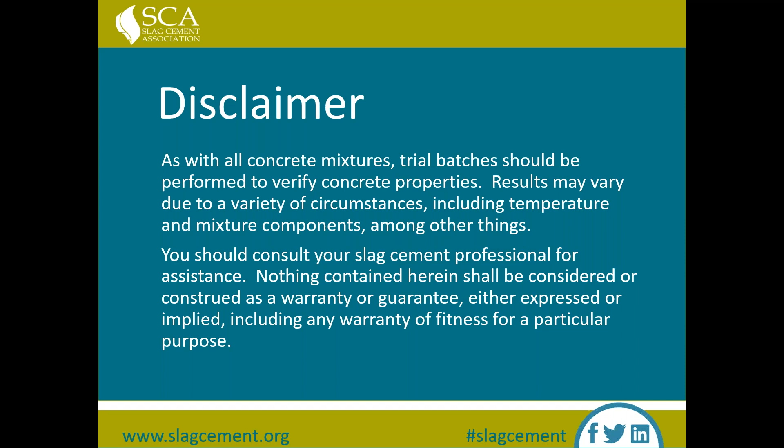Gordon McLellan is Technical Manager at Lehigh Hanson Slag facility in Cape Canaveral, Florida. He has been involved in the development and growth of slag cement, formerly known as ground granulated blast furnace slag, in North America for 28 years. After Queen's University, he worked with Coke Minerals in Sudbury, Ontario, Canada, developing applications using slag cement in mining, backfill, and geotechnical applications in heavy construction.

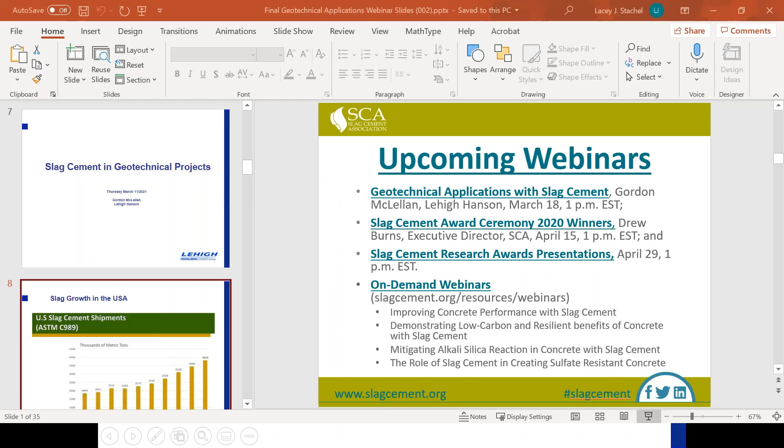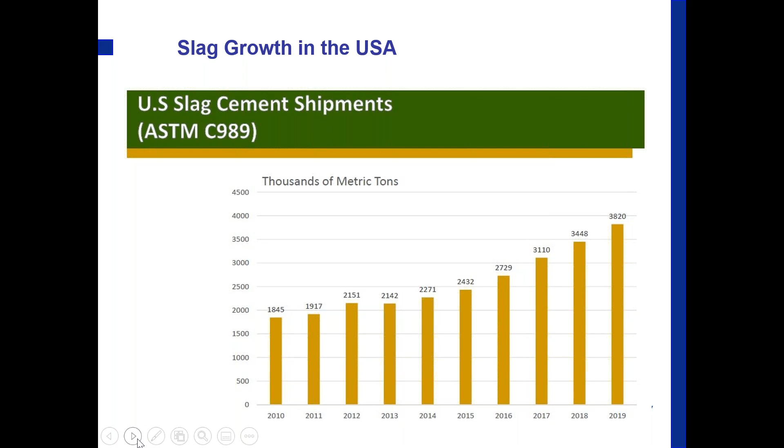I'd like to start just by talking a little bit about slag cement and specifically slag growth in the USA. As you can see, we're approaching 4,000,000 metric tons of slag with some fairly amazing growth over the last 4 or 5 years. In fact, it's fair to say we've doubled since 2010 in product and product availability. And for various reasons, I would like to think that it's mainly the high performance and the environmental concerns driving us towards using more slag cement. Next, please.

So the main difference is that the finished product, the slag, which is floating above the Fe, can be characterized more as a dicalcium system. What we're really missing is the C3A and C3S that we find in Portland cement, but everything else is there. Another way to look at it is typically calcium in Portland cement runs 60 to 65%. Calcium in slag tends to run between 38 and 42%, and most fly ash is below 10. So the fact that slag cement can be viewed as a hydraulic cement shouldn't come as too much of a surprise when we look at the genesis, with that vertical cement kiln versus the horizontal cement kiln. So let's look at what happens to the slag floating on top of the Fe. Next, please.

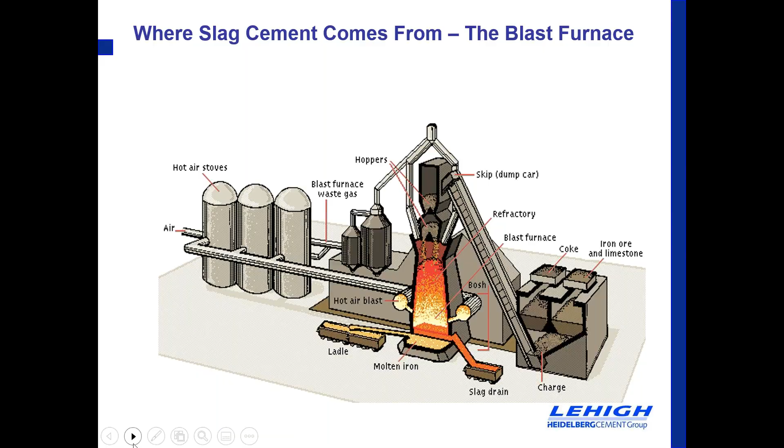I love this picture. It's the color more than anything else that to me, it is energy. We are showing energy. In this case, for the most part, this energy is wasted. The slag is coming out of the blast furnace. We're letting it air cool, and it's turning into an aggregate.

Now, it's fairly common to see concrete paving around most of the steel facilities in North America made with blast furnace aggregate. It's a perfectly fine aggregate. It's air cooled. It is slightly more porous, so our concrete guys have to know how to handle it to make sure the aggregate is soaked and so forth to deal with that, and it makes perfectly fine concrete.

There is, however, a higher value that can be assigned to that material if we process it a little further, and that's really what we're talking about today, is how we make a higher value product. Next, please.

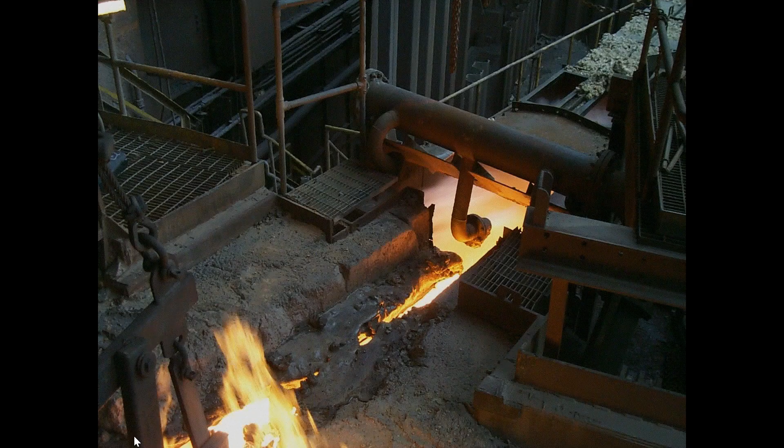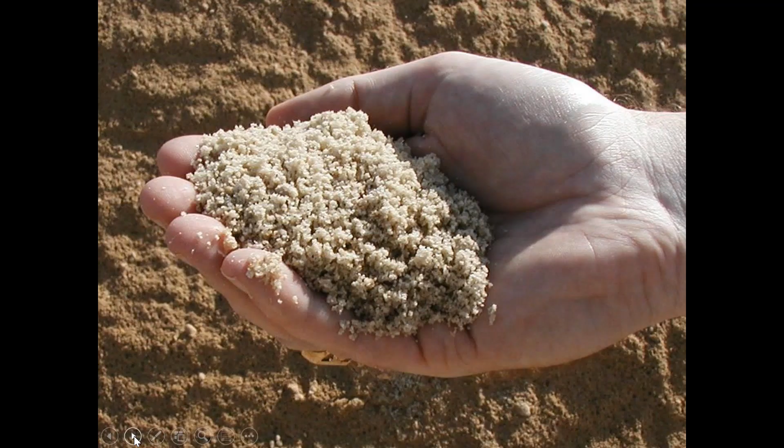And this is the journey of turning slag into cement. What you see here is the granulator. The purpose of the granulator is to impinge high amounts of water to turn it into what you're seeing in that gentleman's hand. If you look closely, you can see little whiskers. And in fact, it is between 90 and 93% glass.

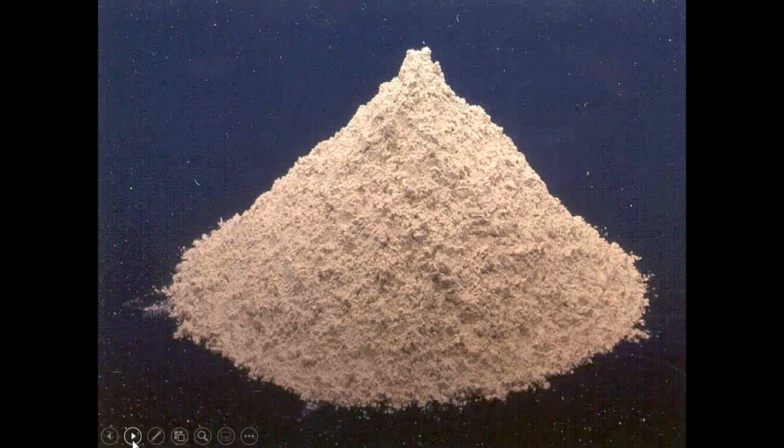That's the purpose of taking that material from its molten stage and turning it into the raw material for slag cement. So in the past, we used to talk about granules. This is granules, and slag cement was referred to as ground granulated blast furnace slag. The raw material here is ground into a hydraulic cement. The first thing that we can see, obviously, is it's very light colored and looks much like white cement. Next, please.

So, what are the differences between Portland cement and slag? Well, as I said earlier, the cement is typically manufactured with the use of a kiln, requiring high heat and some virgin materials to produce a clinker, which is then ground into hydraulic cement, versus slag starting out as a recycled waste material. What you saw in that molten form, we've now processed it slightly more to turn it into glass, to turn it into a cement.

That process uses less total energy and has no carbon associated. The carbon is associated with the making of the Fe, and this is looked at as a recycled material, driving some of its increased use around the world.

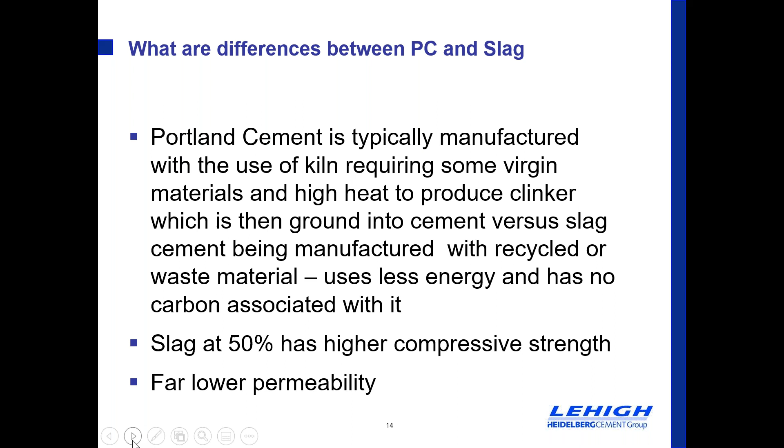So the other aspect, and again, I'm not going to go into all of the details, because if anybody has watched some of the other webinars, they've gone through and listed the numerous advantages of slag in ready-mix concrete. The purpose of this presentation is more to focus in on the application of slag cement into a geotechnical application. So really the two things that are most important are the higher compressive strength at 50% and the far lower permeability. That's what we in the geotechnical world care about. Next, please.

So, PSI per pound of cementitious. Slag cement is more hydraulic in lower amounts and higher water cement ratios than Portland cement. That's a relatively easy sentence, but I always like to give a little color to it.

One of my first geotechnical applications was slag cement in mining backfill, where we were replacing Portland cement with slag cement to achieve low strength fill in these vast chambers underground. And the last project I show will deal a little bit with that, but not getting ahead of myself.

The interesting thing in that first application was that we went from 100% Portland cement to 80% slag, 20% Portland cement, and we reduced the total cementitious by 50%. There was a huge savings in that initial replacement, and we're going to deal with why we could do that. But for the purposes of this discussion, I really want to tell about the first phone call I got

after the application of this material underground, and it went something like this: you have solidified all of our sumps in our mine. What I'm saying is, whereas with more cementitious and no slag but Portland cement, the material would work its way into the bottom of the sumps, and because it was in small quantities, it was just handled as a normal fluid.

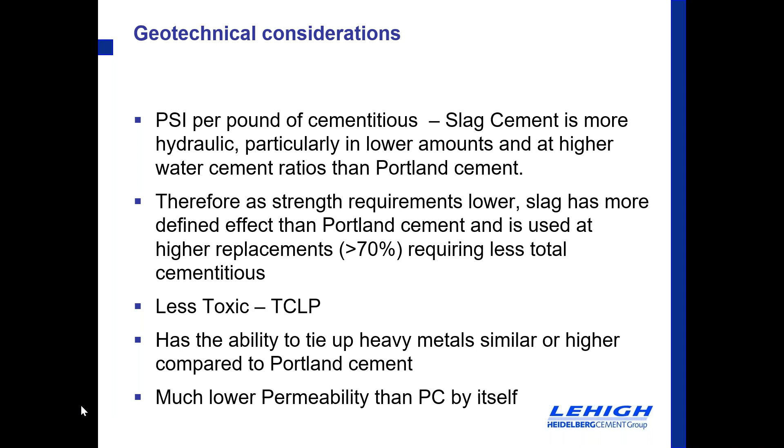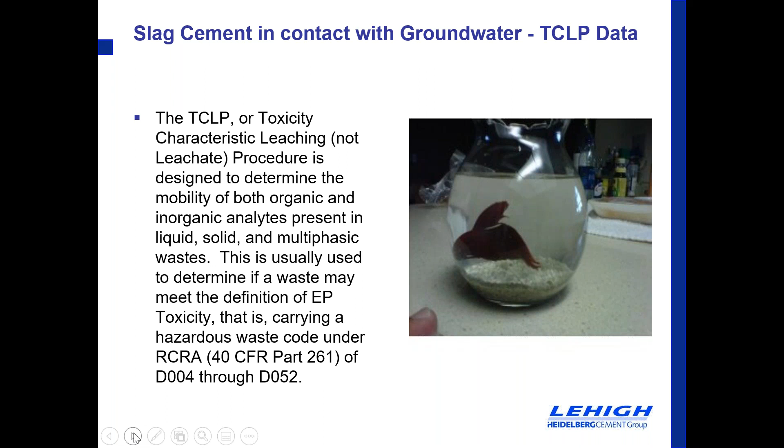of the target. So we brought this into a presentation we were giving at a Department of Transportation. We called the fish Little Charlie, and it was our graphic representation of the fact that slag cement is considered very appropriate in this application. So, next slide. The details behind that are shown here.

So here we have heavy metals: arsenic, barium, cadmium, chromium, lead, selenium, and we're showing the typical results we see. In most cases, non-detectable. Barium still very low, but the limit obviously is substantially higher. So this is one of the reasons why we're involved in so many geo projects where they're trying to capture or tie up elements in the ground.

I would also add that one of the elements we're missing here that has come up and gotten some attention over the last 5 years is aluminum. Aluminum is not a heavy metal. It's one of the most abundant metals in the Earth's crust, and it's very light. So typically it was not viewed as a target element. Now there is some discussion about aluminum and toxicity and potentially contributing to Alzheimer's and other things, but that data is still a work in progress. We don't test for it.

In some of the sites we're at, in the test wells, they do monitor it, and when the job is done right and we've tied up the soils appropriately, we don't see anything moving through the ground because of the very low permeability we've achieved with slag cement. Next, please.

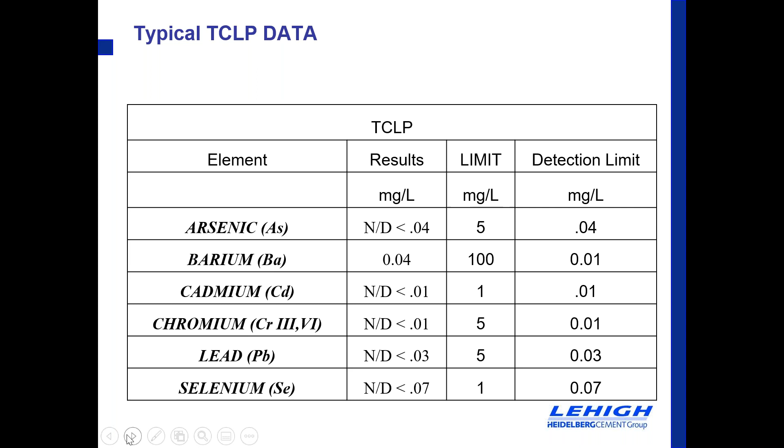And there is a dike that was constructed in the early 1900s, was refurbished around 1937, and has been virtually unchanged. And the concern was that we were starting to see seepage coming through the dike, and many discussions were had as to how to solve this problem. And the winning approach was a cutoff wall down the center of the dike. And the dike, I think, is 147 miles long.

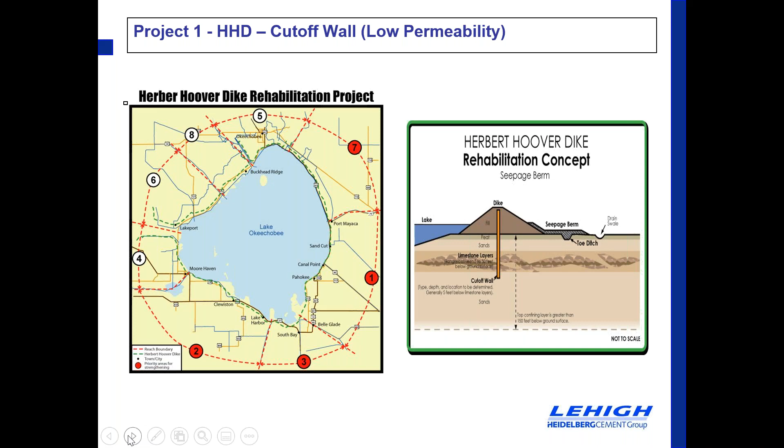We started this in the mid 2000s, I think 2006. The next slide will document that, but with very interesting results. Next slide, please. So, as I said before, let's look at that. 143 miles. I was wrong.

We started this project in 2006 through 3 contracts, each worth $250 million. We're now in the last phase. We currently have 5 task orders or sections being completed. The whole entire project is fast-tracked and should be finished by next year. And the goal is to have the dike able to handle the higher waters and stop the leakage that was occurring through the dike.

Now, we have 3 contractors on site right now. They're all using a mix design that is approximately 75 to 80% slag and 20 to 25% Portland cement. Next, please.

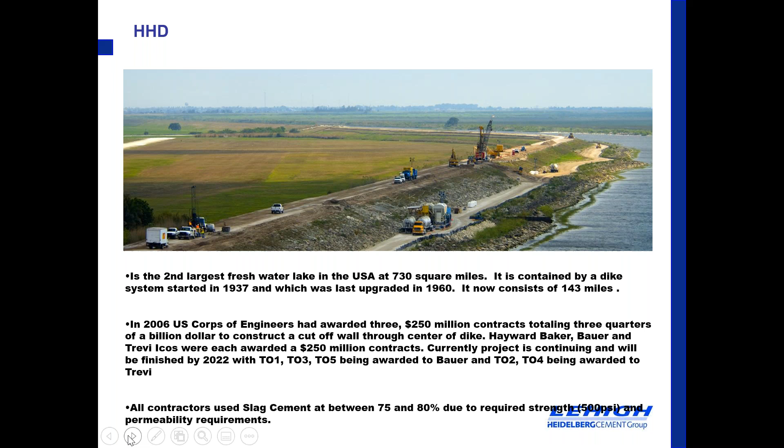So all variations on a theme. Most of you have seen hydromills, cutter soil mixers, or TRD machines. Ultimately, what we're doing is mixing a cement slag slurry with the existing ground conditions, allowing that to solidify, looking for relatively low strength, 500 to 800 psi, but looking for very low permeability. And that's the reason why that mix has gone to such a high proportion of slag cement.

I like to look at it for every linear foot of dike. They're using, depending on the process and whether they add additional soils to the ground or not, anywhere from half a ton of slag cement to 1.5 tons per linear foot. So extremely huge project. Next slide, please.

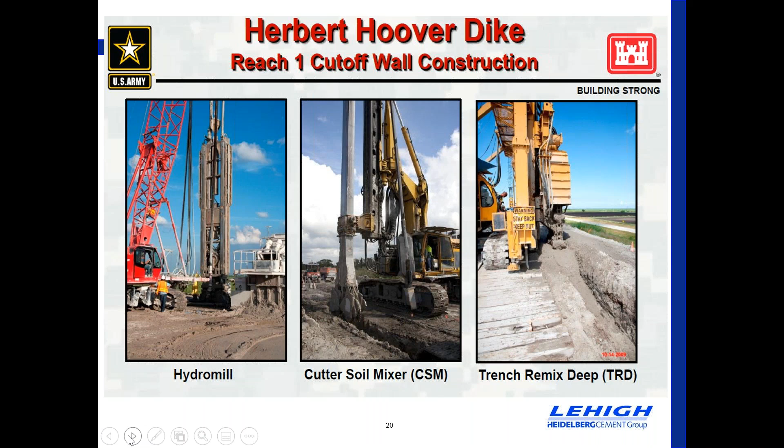And again, another look. This is the TRD, which currently is not being used, but I did like this system, and it is being used in other places. You can see it's basically a chain and cutter with the soil, the cement, bentonite, slag mixture being injected into the soils. Next, please.

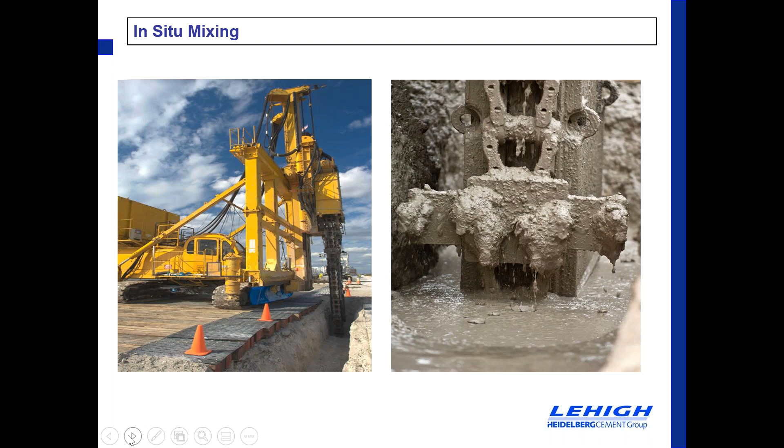So this project, when it first came out, we really wanted to look at it carefully and make sure that we were supplying enough technical information. So this is one of our first lab studies that we did, comparing 100% Portland cement to that traditional 75-25 slag, and in this case, we also wanted to push the envelope and see what a 100% slag cement would do in this application. Again, kind of trying to earn our designation as a hydraulic cement on its own.

And the data is quite interesting. You can see that in most cases we were doubling the straight cement strength. And in these applications, this is not ready mix concrete. Typically we're looking at between 300 and 600 as the target strengths. It can vary up to 1,000 on some geo jobs, but typically that's the range.

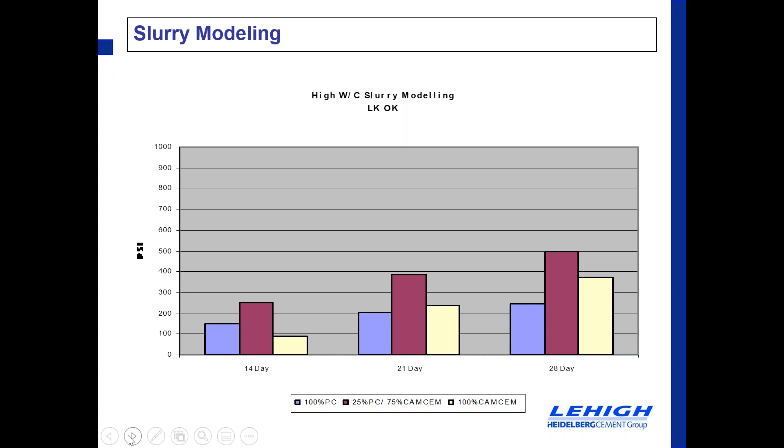So in this application, we probably could have used 100% slag to achieve something that would have been acceptable, in this case, better than Portland cement. But that is also because of the other mixtures that were going on in the soil and so forth. Next, please.

So you can see the high alumina plus gyp. So we are now using calcium sulfate or gyp at about 3% with our product, and most of the producers of slag cement do that. And you can see some of the effects that has on early strength and even later date strength.

So we originally tested with moderate alumina, and we ended up over the last 10 years moving to a high alumina plus gyp. High alumina, as I said before, being 14% alumina. Well, specifically 12 to 14% alumina plus 3% calcium sulfate, and obviously with very, very good results. Next, please.

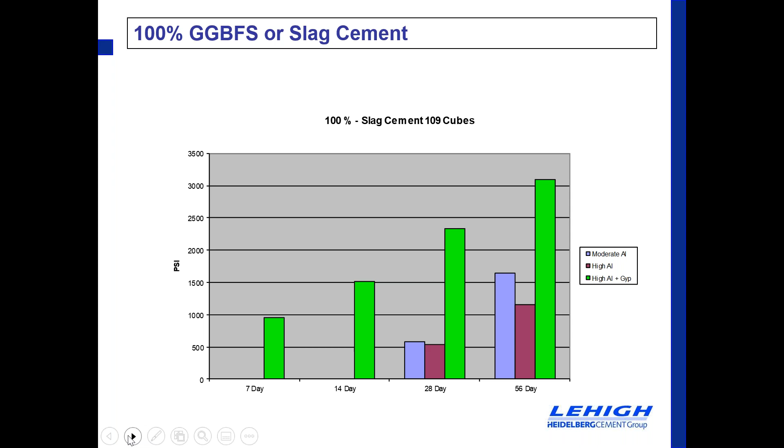So moving on to another project. This is the Miami Access Tunnel. This project was 5 years ago. I'm sorry, I don't have the exact time for that. But next, please.

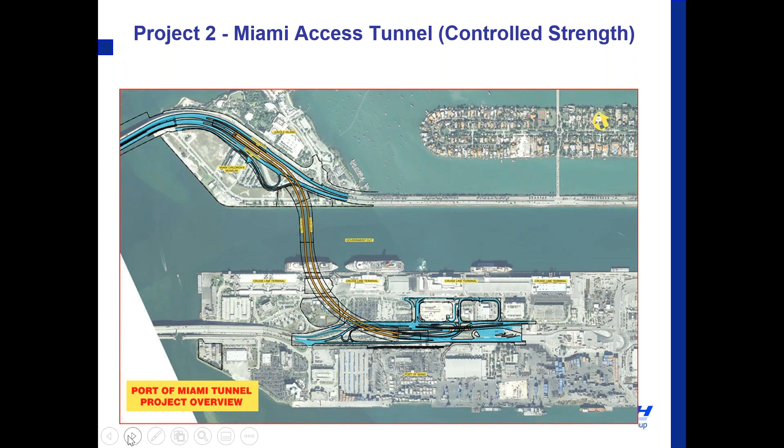Slag was employed on this project in two ways. One, in the geotechnical side, where we used 70% slag in shallow soil mixing. And also, interestingly enough, we used 50% slag in the concrete precast tunnel lining. And I know there'll be other discussions about precast and so forth, so I don't want to get into that too much.

But I will say this was an interesting use of slag cement in the precast tunnel lining, in that there was a 150-year life cycle that we had to try to identify for the precast, and the winning mix used 50% slag to achieve that, part of that being because of the low permeability that we could then factor into the durability analysis. But today we want to talk about more of the geo side, the 70% slag and the shallow soil mixing. Next, please.

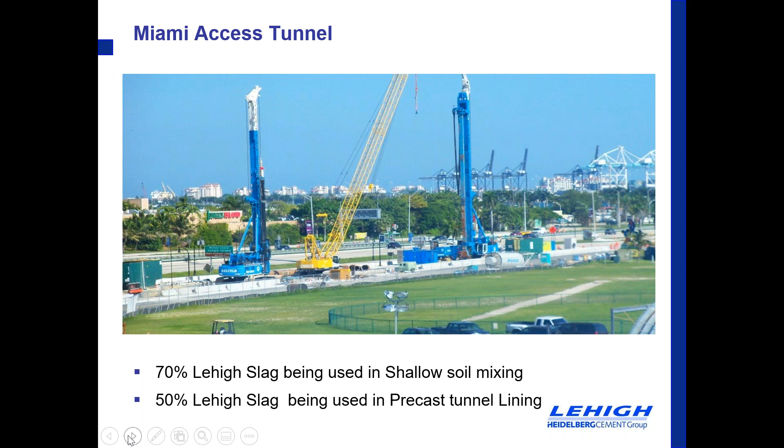So this is a great picture of the tool itself. So think of it this way. The ground was there, nothing was done to the ground. The contractor shows up on the site with this particular tool, which is a large cutting tool, which he then drives into the ground hydraulically, and then running down the center of the tool is where we put the slag cement, bentonite, and Portland cement mixture.

Then the tool reaches the target depth. It then reverses out as it is mixing that cementitious material in. And the real issue when we started this was, well, what should that mix look like? Next, please.

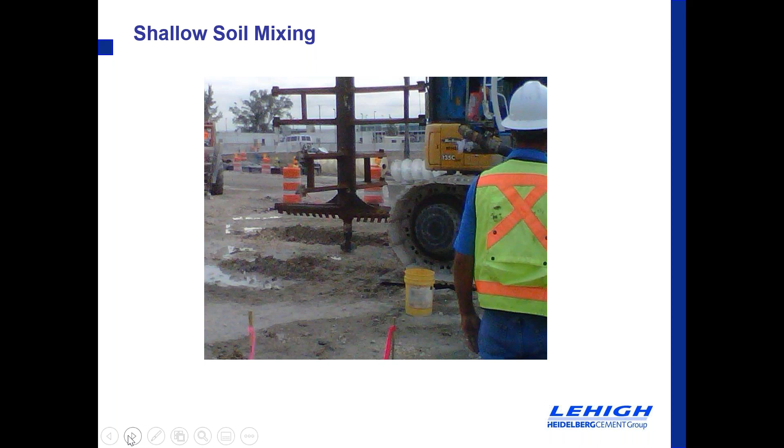So we spent quite a bit of time in the lab trying to figure out exactly what we could do and why we should do a few things. This first slide shows the target was 300 kilograms per cubic meter.

So we took the native soil we were trying to solidify and ran 4 or 5 different mixes. The control is on the left, that's 0, so that was 100% Portland cement. Then we tested 35, 50, and 70. We ran it up to 70 because this was also a DOT project, and 70% happened to be where their specification allowed us to use up to 70%. We didn't want to go above that, though as I said in earlier slides, in this particular application, 80 and 85% is also used quite often.

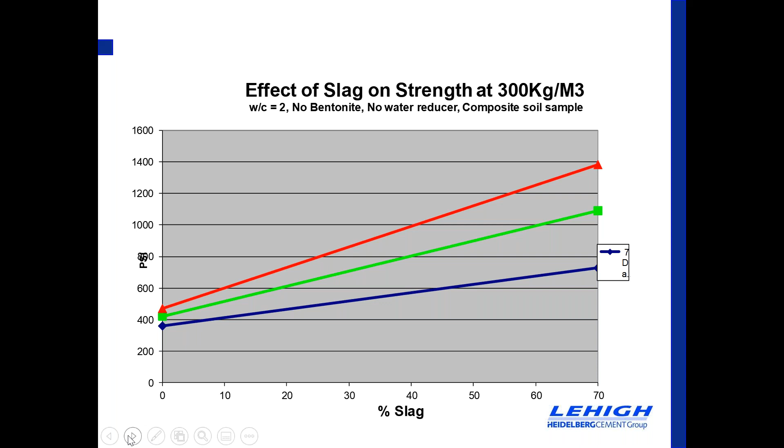So you can see the 7, 14, and 28-day results, and not what most people would expect. But look at the water cement ratio, extremely high water cement ratio. And it's also in the soil, the in situ soil.

Interestingly enough, the 100% Portland cement didn't really move that much, it stayed roughly where it was. For numerous reasons you could hypothesize the organics, every bit of the soil changes. We do know as the soil levels have higher organics in it, it hurts Portland cement more than it does slag cement. Typically, one reason you can consider is that the slag is very glassy and absorbs water slower than the Portland cement.

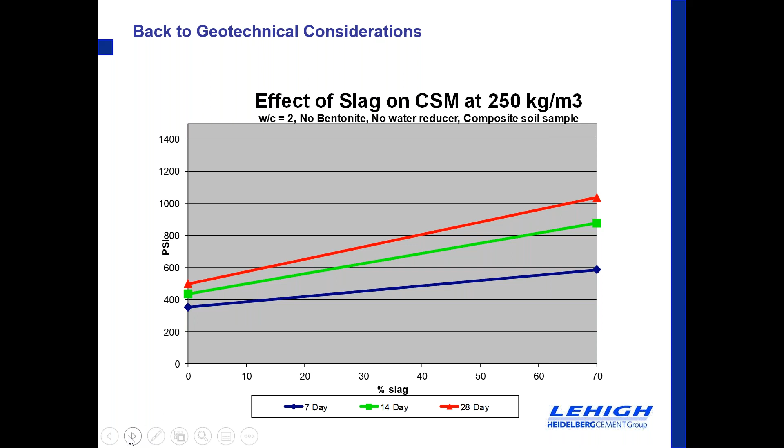So at 7-day, 14 and 28 days, we were targeting, I believe, 800 PSI, and we were well within that target range. So the decision was simply the lower total cementitious, the 250 kilograms per cubic meter, and 70% slag.

The next project I wanted to touch on was something we did in Sanford. This was an old gasification plant where they had lots of heavy metals in the ground, and they were looking for a way of tying up those metals. This was also a Superfund site, I believe, as well.

So in this particular slide, you can see the tool, and that tool is very similar to the other tool I showed you, spinning down into the ground, and then on its way up, putting in that slag cement mixture and allowing the whole area to solidify. The proof in the pudding is the test wells around the project site, proving that the lowered permeability of this particular mixture was keeping the target heavy metals tied up. You can see the tool in the distance, you can see the plant there. That is a slag silo and a Portland cement silo.

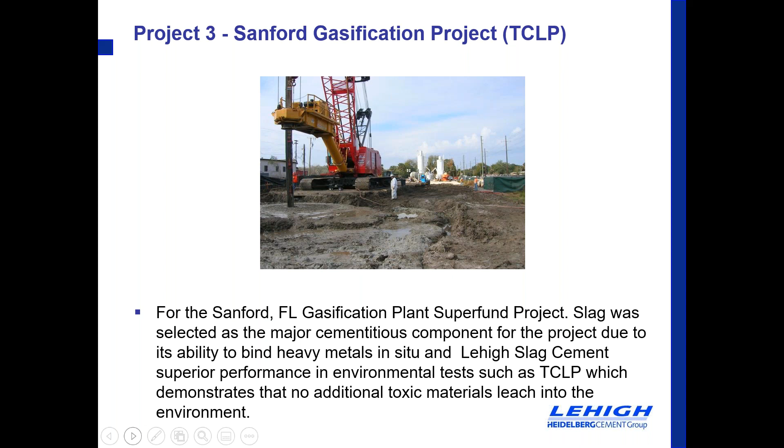So this next project kind of ties up everything I've been talking about, and I get to repeat some of the good stuff yet again. This is the Jade Signature project in Miami, downtown Miami. Every bit of concrete in this project contains slag. We're going to focus more on the geo side, but it's of interest how this project has evolved. The first part of the project clearly was deep soil mixing.

That was 13,000 tons of slag used at between 80 and 90% and 20 to 10% Portland. That range was simply, I'm not quite sure why they settled on two different regions. I think they were concerned about early strength. So some of the edges were done at 80, but the center part of the project was all bumped up to 90%, 10%.

Then once that was completed, mass concrete was put into the hole that was dug after the deep soil mixing, and that was mass concrete at 10,000 psi, where we used 60% slag, total cementitious of 1,040 pounds. What we're seeing in southern Florida is that because slag is widely available now, most of the mass concretes are moving towards slag for temperature control, but they can also achieve higher strength. So in my mind, that's always an oxymoron when you have mass concrete at high strength, because it's an exothermic reaction. The more strength you generate, clearly the more heat you've also generated over time.

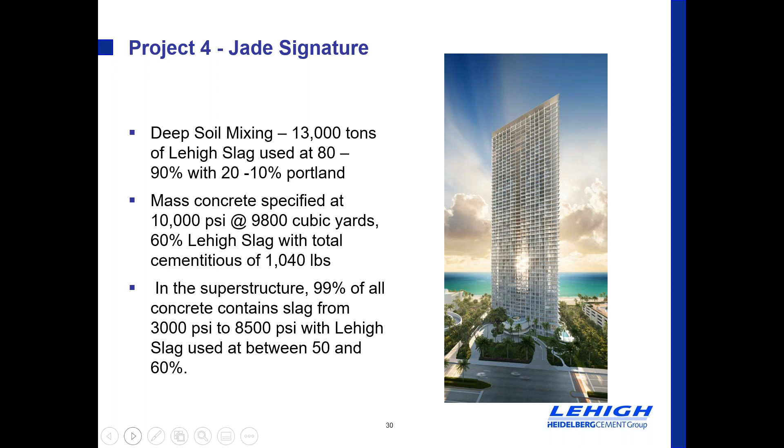So what we're seeing in this application from a geo perspective is that they're now making more underground parking in downtown Miami, for example, because they have a method of doing it.

In the past, if they wanted to build an underground parking structure, they would ultimately have to dewater the ground. They would do a trench around the whole project where they would use tremie concrete, or concrete that would solidify underwater, to make walls around the structure and use that lower permeability, then pump it out and dig out the center. This is a different movement from that, in that the entire ground is solidified, not just the edges. Then, like a reverse computer chip, you dig out the material where you don't want it, and whatever needs to be done—whether it's a mass concrete element or some other concrete element—can then be put in. So it's an interesting use that is well within Slag's technical parameters of being able to achieve low strength with very small amounts of material, which is perfect for these types of applications.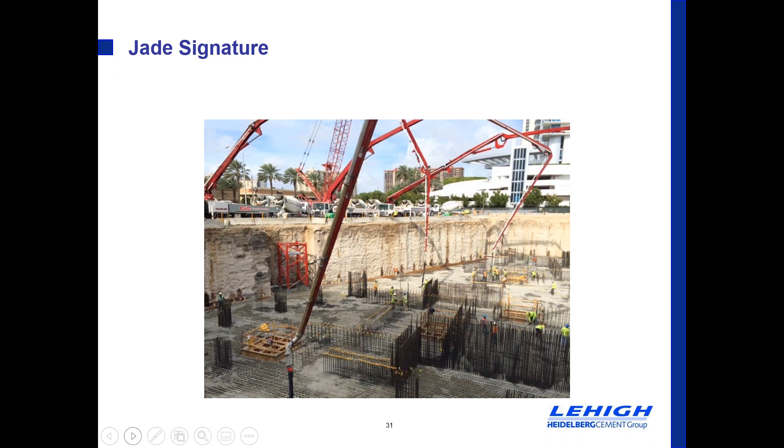So the last project is, again, what we wanted to talk about, where I started. This is where I started in Slag underground, and it's fitting to end here. So what they're doing is there's a large chamber, which I'll show you on the next slide, that they need to fill up, and they wanted to fill it up in the most economical fashion.

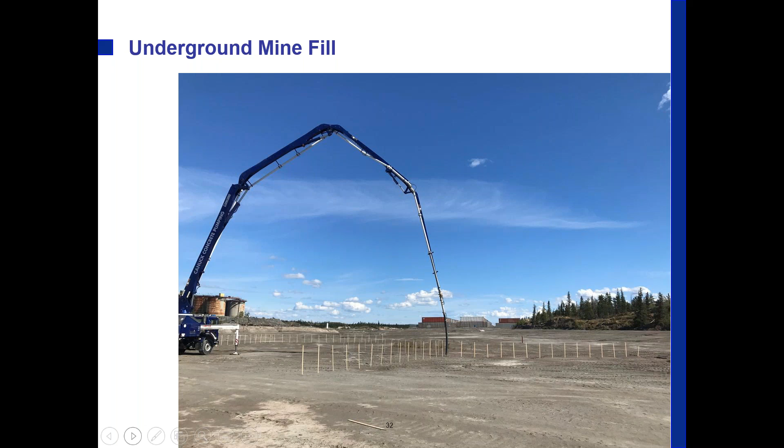So what they do is take the waste material from the mining process, called tailings, coming out of the mill, that they then re-fluidize and pump with slag and Portland cement, and place that underground to again achieve that low strength with low cementitious values that they need to shore up the mine itself.

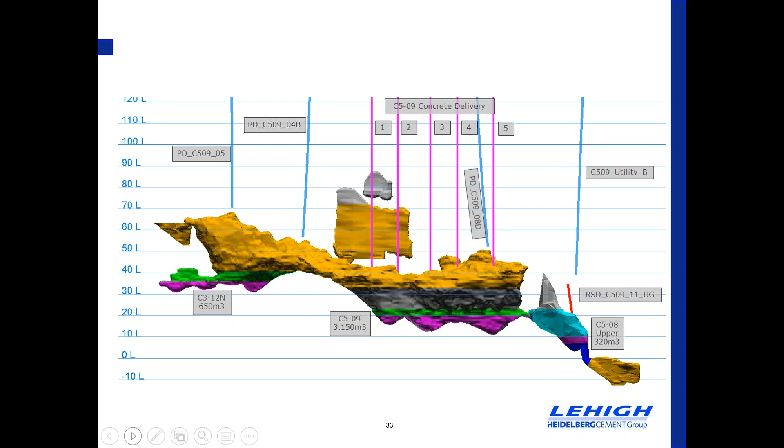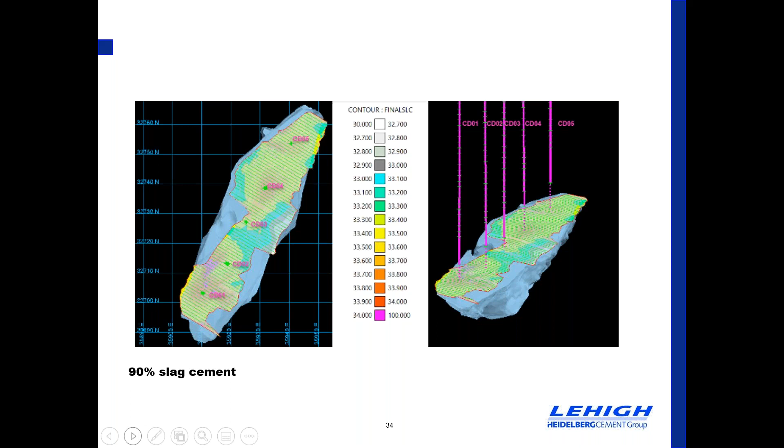Another view of that, and in this case it was 90% slag that we're showing, but I think the project will also talk about various mixes they used in various places. Next, please.

Well, I think that's it. So I'd love to address questions.

Thank you, Gordon. I am just double checking to see if there's any questions. I don't see any at the moment. Give just a few seconds to see if any questions come in. Okay, it looks like there are no questions.